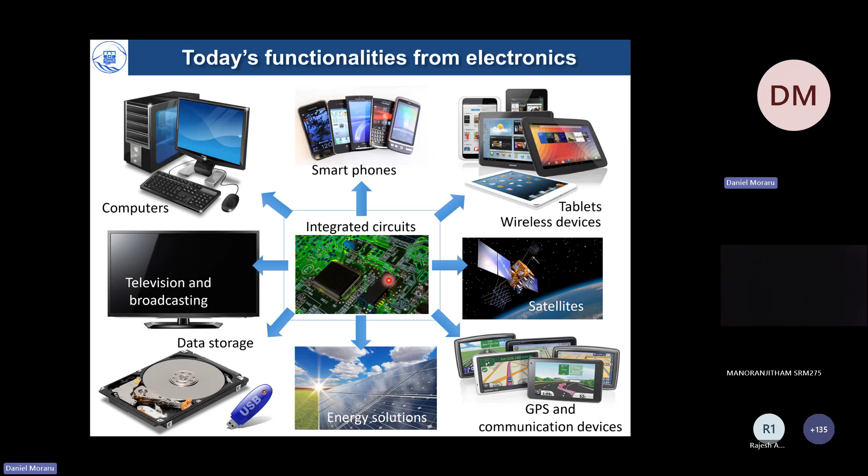So let me start with the first very brief historical introduction. Of course, we are very much aware of the importance of integrated circuits in our daily life. This is one version of many slides that reveal how electronics affects all aspects of our lives, from communication to storing of data, wireless and smartphones, satellite GPS. Anything is now affected by the capabilities of the integrated circuits, which are at the core of any computer. But behind the integrated circuits is the invention of the transistor.

And here is a probably very famous snapshot from about 80 years ago of John Bardeen, Walter Brattain and William Shockley, who co-invented the transistor. And that was, in a way, a breakthrough, moving away from the vacuum tubes that were used as switches. The transistor was not very beautiful. It was just a piece of semiconductor in contact with a piece of metal, but it worked as an on-off switch. And it was enough to trigger further development.

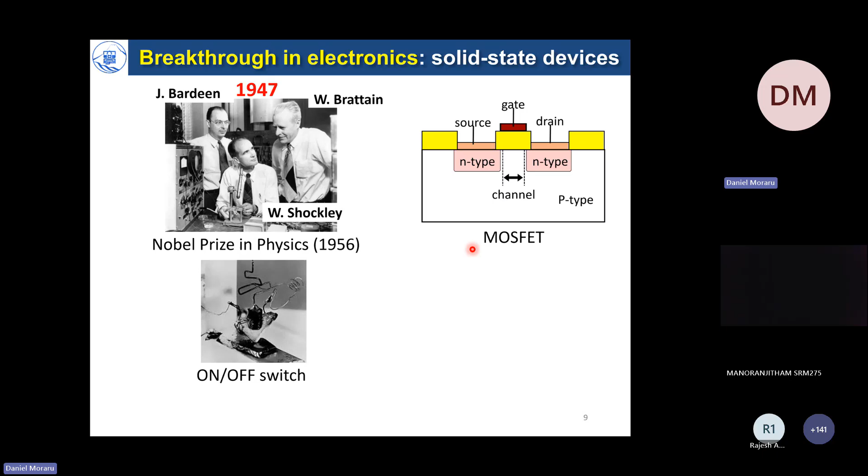Now you are very much familiar with this kind of view. You may have a source and a drain, let's say N-type, and a channel which is P-type, with its potential controlled by the gate. That's a MOSFET, metal oxide semiconductor field effect transistor. Now, this in billions and billions is connected inside a 1 centimeter by 1 centimeter chip, and it provides us the functionality that we benefit from nowadays.

So, historically speaking, we should treat the transistor demonstration as a trigger to the information age, and what followed next was very famous: the continuous miniaturization along Moore's law, Gordon Moore being the Intel CEO at that time in the 1960s. So this view is very famous.

The horizontal axis shows the year, the vertical axis shows either transistor density, or on the right, the minimum feature size, the gate length typically. So as you may see, in the 1970s to 1990s, practically Intel was the leader and the pioneer in the field of electronics, and these integrated circuits contained not this kind of transistors, of course, refined transistors, but just a few hundreds or thousands of transistors with dimensions on the order of a micrometer.

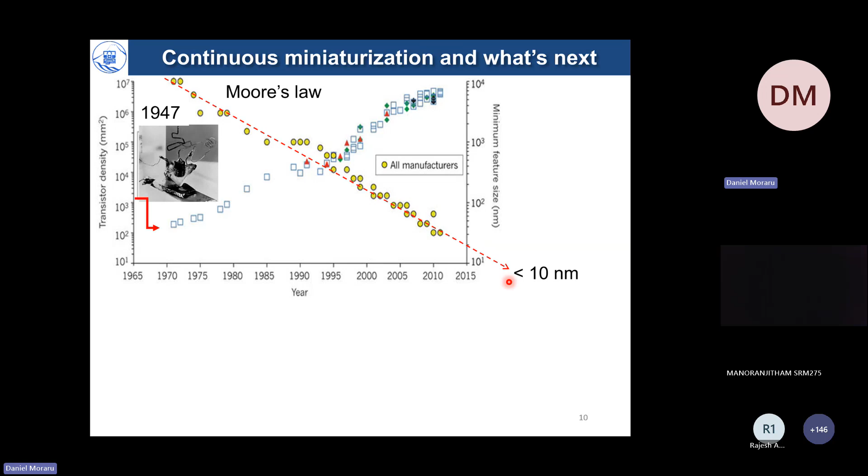But then things were developed so much by competition and by manufacturing improvements that nowadays, this figure is a little bit outdated, but nowadays we certainly have gate lengths below 10 nanometers in our computers, actually. And that allows us to pack a lot of information into a very small area. A few years ago, the 22 nanometer node brought us also to some vertical scaling, and this also helps to push this law further and further.

However, we are all aware that we are reaching the physical limits, and in my lab, as to what we see about the next generations of electronics, since this is the purpose of this training as well: in my view, we'd like to use electrons one by one. So ideally, we want low power consumption from these devices. A compact design should also be expected.

So every atom counts, and we want to involve fundamental physics, especially quantum mechanics, which is not sufficiently included in the current operation of transistors. We also want to keep CMOS compatibility for many reasons, including costs, but also including advanced technologies. So with this in mind, my lab's view is to attack the problem of controlling single electron tunneling in silicon nano devices as one of the new mechanisms for the next generations of electronics. How we will do that, I will explain in the next slides.

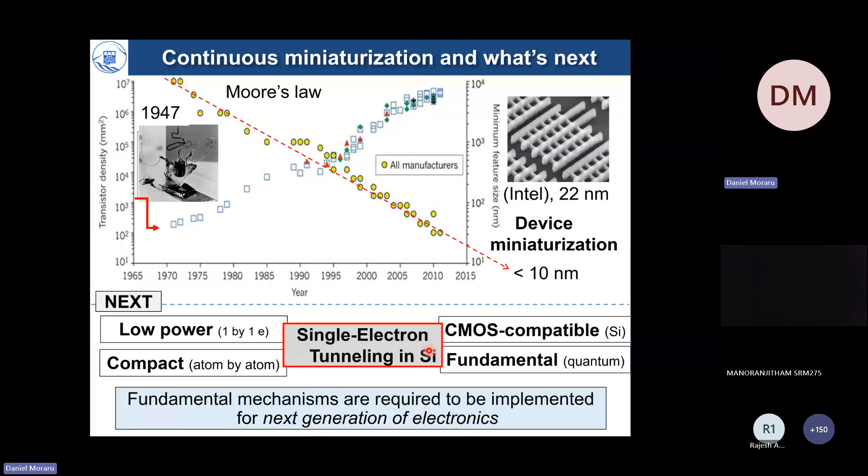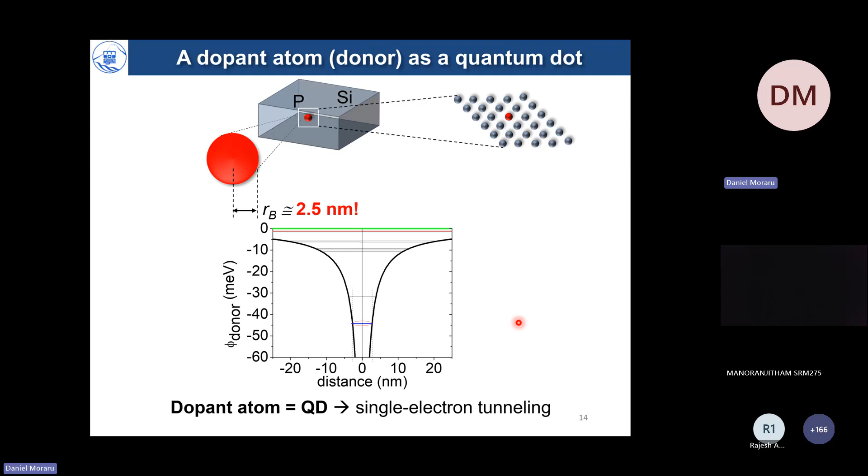Of course, we know the spectrum of this kind of atoms very well for tens of years by now, but what we don't perceive very clearly is that this can become a quantum dot. Once an electron is injected here, if we could avoid its thermal activation to the conduction band, we can actually move it in and out by tunneling from leads nearby, and that makes it a very good quantum dot.

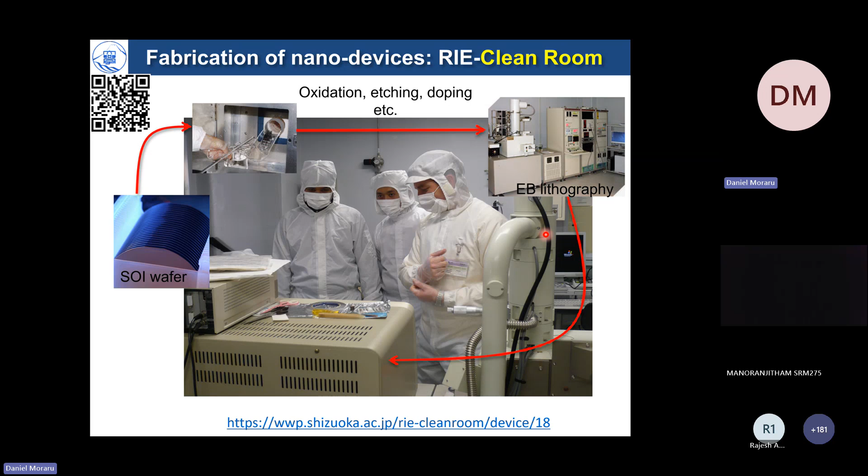So please check what is available in our clean room from these links if you're interested, and hopefully in the future you can experience these techniques as well.

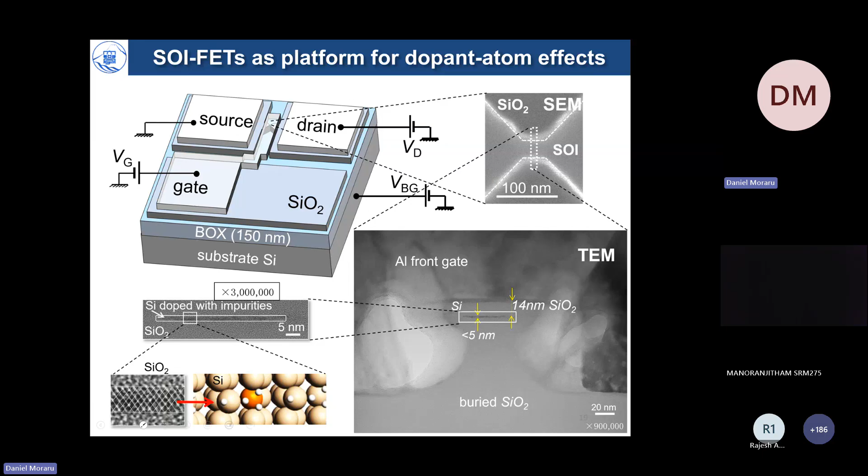Now, even this kind of small dimensionality capabilities are not so interesting for us. What we are interested in is the functionality that we can obtain from substitutional dopant atoms or impurity atoms and not from silicon atoms. So we should understand very clearly that we are actually building these big devices, actually microscale devices with nanoscale or hundreds of nanometer size channels in order to capture the atomic level functionalities.

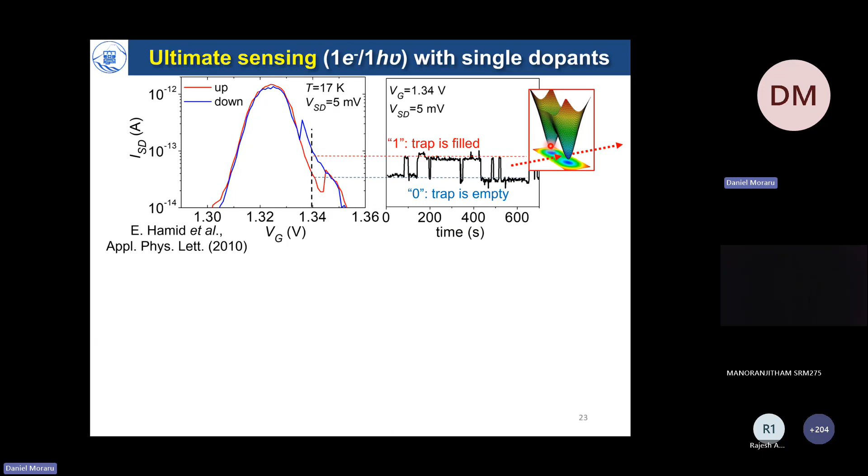And that switching is actually a detection using single electron tunneling through one dopant of a charge state of another dopant working as a trap. So this could be developed or converted into a memory concept which utilizes a single atom as a sensor and a single atom as a memory node.

We could also use these devices under light irradiation because every single photon absorbed in this channel converts into an electron-hole pair. Now, if you have traps nearby, the electrons can be captured by these traps, and we can actually use this single electron tunneling current to sense this kind of traps. So if you compare the time dependence in dark with the one under light illumination, here we use the visible light, we can see that there is a clear dependence on the photon flux in terms of switching of a current, so-called random telegraph signals.

So this kind of dependence indicates that the number of photons influences the number of electrons trapped, which subsequently influence capacitively the charge flow to the main dopant. Again, this is another APL around that time. So this was our initial statement. But please note that temperatures were relatively low.

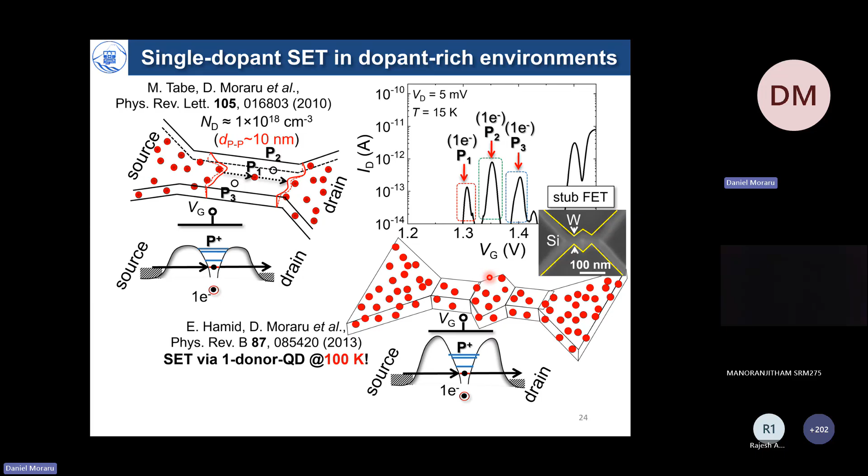So now with this kind of background and this kind of physics, we wanted to raise the operation temperature. So to do that, we figured out that we should change the simplistic structure of a channel into a stub-shaped channel. The reason for that was that even if you have a random doping in this kind of devices, some of the dopants could be in these sharp corners and surrounded mostly by SiO2 oxide, and also affected by quantum confinement and dielectric confinement. In that case, the dopant state becomes deeper.

So with that, we demonstrated that a single electron tunneling current peak can be observed in some devices even at a temperature of 100 Kelvin, and that was reported as a world record for single dopant devices in 2013 already. What you should notice here, however, is that this is not an easy current to catch. Please note the current level of this kind of peak embedded into an otherwise FET on-off switch current. The current level is just a few tens of femtoamps.

So in order to detect this kind of currents, we should have the equipment and also the stability of a measurement system and the high quality of the devices. Otherwise, this is embedded completely in the noise level.

So we reported our vision about single dopants and what we can do with them in this Nanoscale Research Letters, Nano Review. And of course, we can develop transistors, we can develop memory devices with two dopants. If you have more dopants, you can build turnstiles or pumps. And as I showed earlier, optoelectronics based on dopants is also an option.

And I'd like to add to that the fact that we can actually see these dopants with Kelvin probe force microscope, KFM. So if you're interested, please read what we summarized at that time, again, many years ago, as atom devices based on single dopants in silicon nanostructures. So there is already a lot of development, not only from our group, but from other groups around the world in this field.

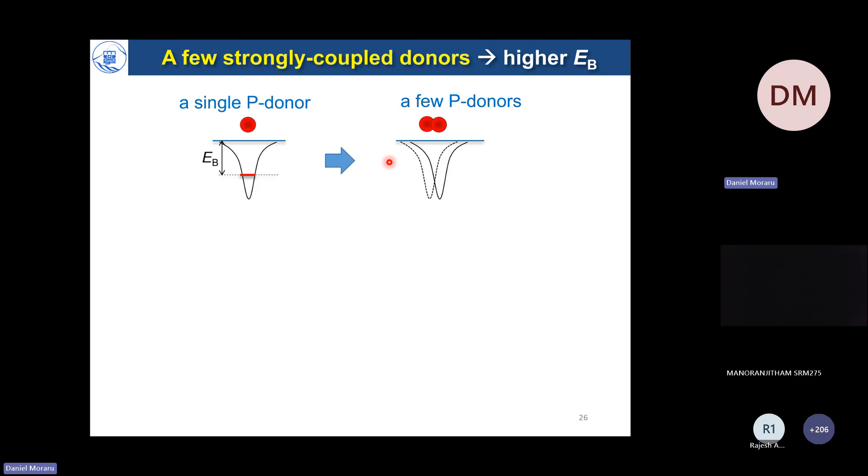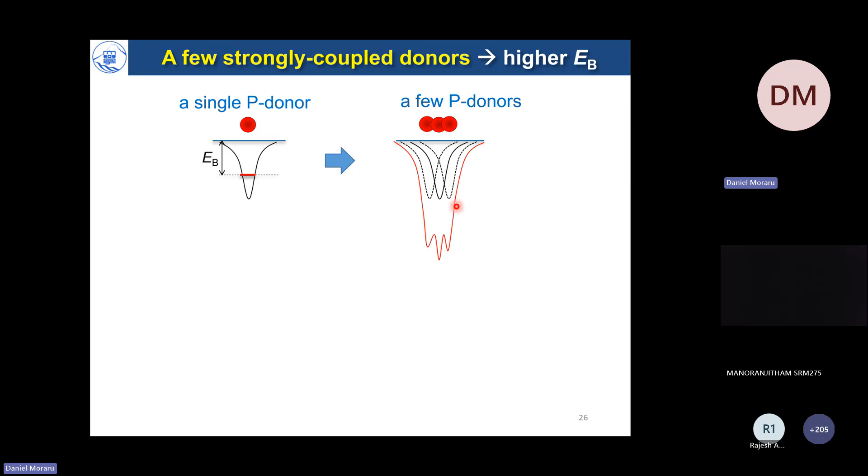So if you couple two donors together, we get a deeper potential well. If you couple three donors together, you get an even deeper potential well. In that way, this kind of a system works as a molecule but at the same time, it can allow us to move from a system with a small tunnel barrier to a system with an enhanced tunnel barrier, as shown on the right.

And then we spin coat the doping source on top of this slightly oxidized surface and drive in the dopants through a thermal diffusion technique in a furnace or a rapid thermal annealing machine. And then the dopants will be introduced only in the desired positions because they cannot penetrate through this oxide mask. Nevertheless, we should be aware that there is side diffusion, so it's not a perfect process.

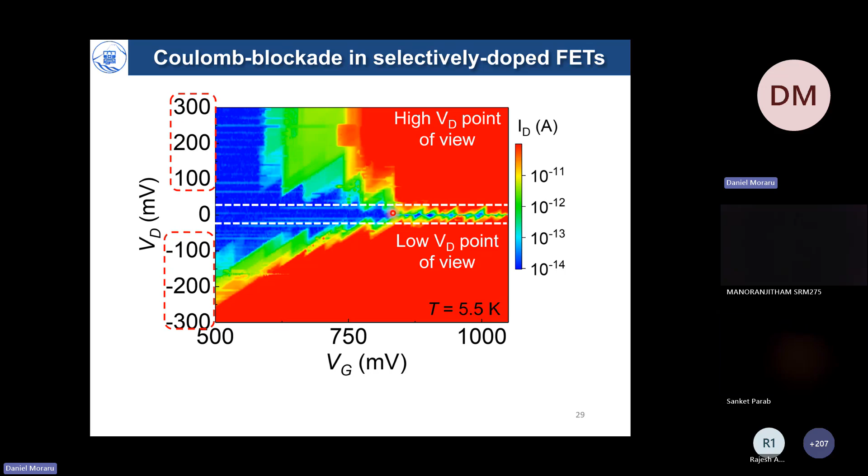They do not close at VD equals 0, and that makes them a little bit peculiar considering our expectation that a single quantum dot works in these devices. So we can at least simply split the stability diagram into two. One is the large diamonds observed at low VG, and the other zone is where we observe fine diamonds at high VG. Each of them will be explained next.

So let me show you one device. For instance, this is a selectively doped SOI-FET device A. We observe this pattern; it is the same device that we explained earlier. And this is a zoom in on this zone of interest, zone 1. What we observe here as dashed lines are these diamonds, open diamonds that I will explain a bit later.

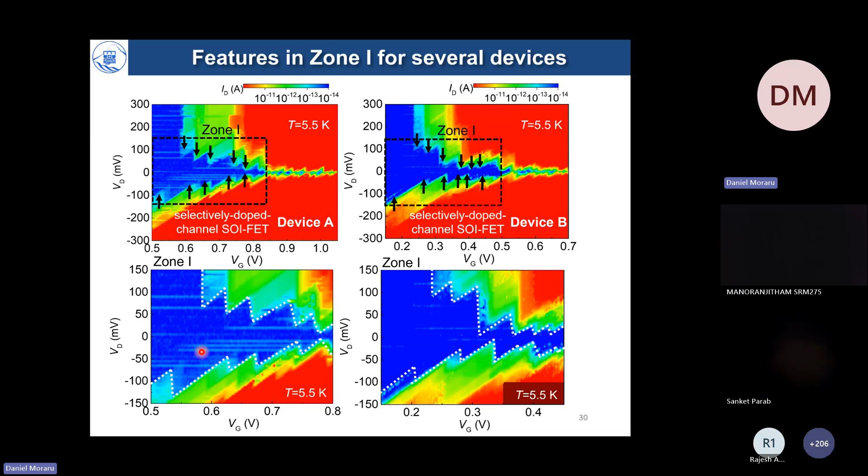Another device exhibits similar but different behavior in terms of voltages and in terms of pattern. But nevertheless, we have two zones, zone 1, which contains these broad open Coulomb diamonds. So the reason for this was a little bit mysterious at that time, and we couldn't explain why we observe the structures from a single quantum dot. So I will explain later how we interpret this.

This quantum dot is actually in the middle between source and drain in a selectively doped region, and it gives rise to such characteristics at very low temperatures. We should note, however, that the gate voltage controls not only the potential of a quantum dot, but also the potential of the barriers themselves. So in that sense, we can actually expect that the resistances affect very much the transport.

So by that time, the gate voltage allows you to fill in this multiple donor cluster quantum dot almost completely, and we are left with only very shallow potential fluctuations, and electrons would tunnel in this way from source to drain at the higher voltages. So now let me return to how we interpret these devices.

Well, if you apply the gate voltage, we are moving the potential in the channel both in the quantum dot and in its barriers. So therefore, we should be aware that the tunnel resistance is actually dependent on the gate voltage. At the same time, what happens when you apply source drain bias? If you apply the drain voltage positively and ground the source, only the drain side barrier will move. So in that sense, we should be sensitive to the drain side tunnel resistance and its dependence on VD.

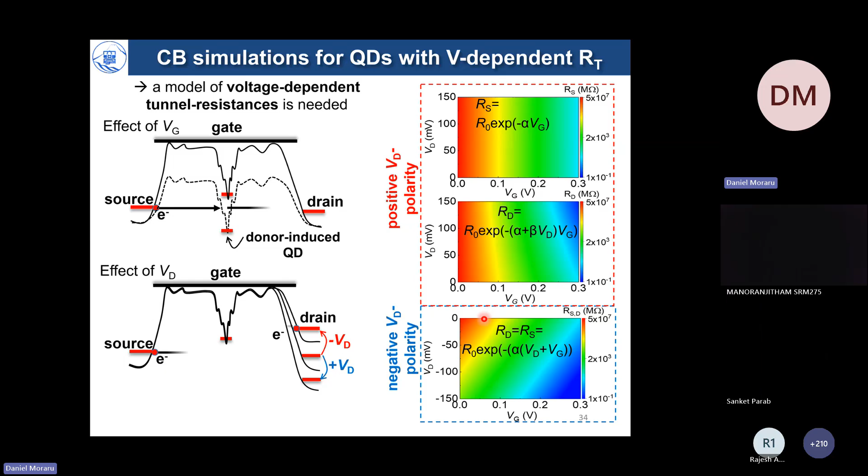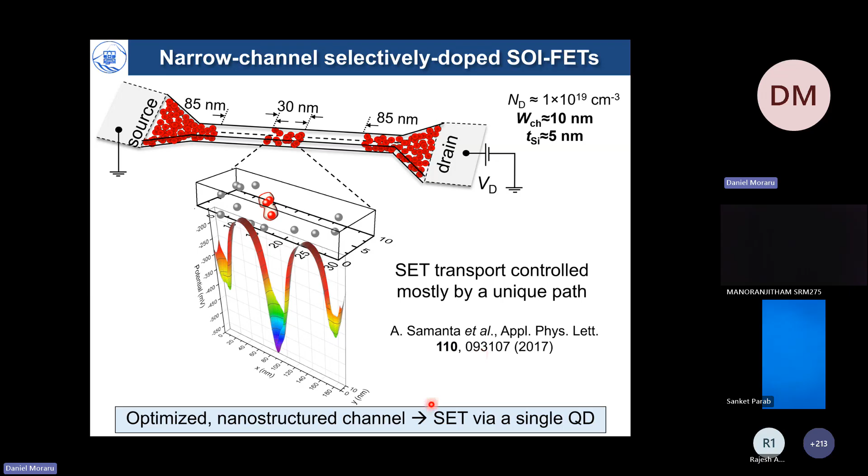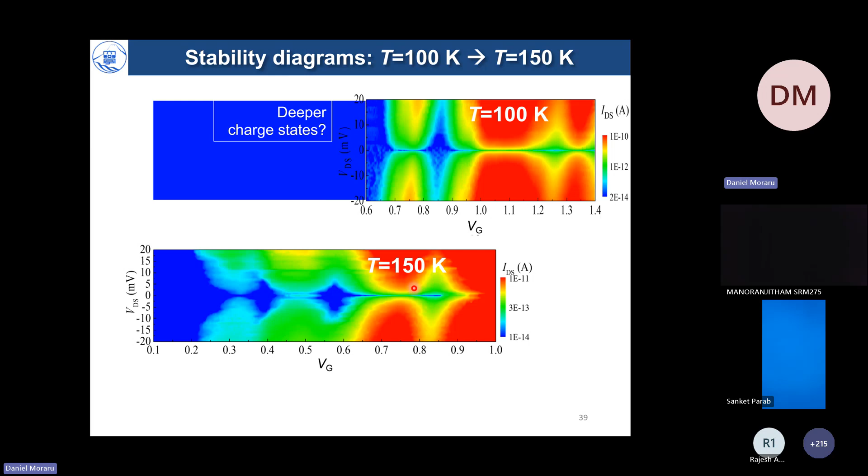And this means that we are actually able to see at mid-temperature range that one electron can be stably trapped in this zone without contributing to current. So it's already a big achievement, but we were curious if we really are dealing with a molecule formed by a few donors. In that case, we should have deeper charge states. If we raise the temperature further to 150 Kelvin, we indeed observed two more Coulomb diamonds at deeper charge states. And that means two more electrons can be finally observed by raising the temperature. And the third electron is also barely seen.

So midway to room temperature, at 150 Kelvin, we can actually read the operation of this device in the following way. As we increase the gate voltage from, let's say, 0.2, 0.3, up to 0.4, exactly one electron can be added into the channel. And if you switch the voltage a little further, you can get even further addition.

Is it okay? Everything is fine? Please mute the mic, participants. Madam, you are set to blocked. Unmute yourself, madam. Okay, better. Sorry, sir. No problem. You go to settings to unmute everyone. It's okay. So sorry for the delay. Should I continue? Yes, sir, please.

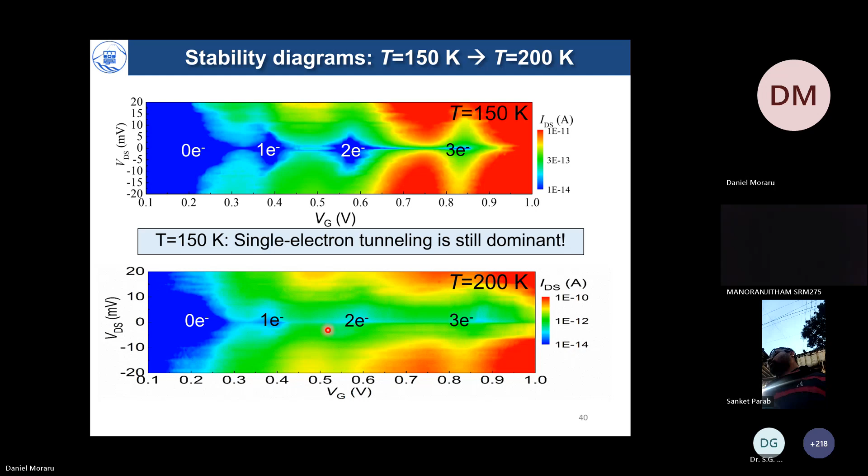Sir, you are muted, sir. Okay, now it's fine? Yes. Yes, sir. Okay, yes, sir.

So you're muted again. Yes, I don't know why this happens, but okay. Okay, can you hear me now? Yes, sir. Okay. So hopefully it stays unmuted.

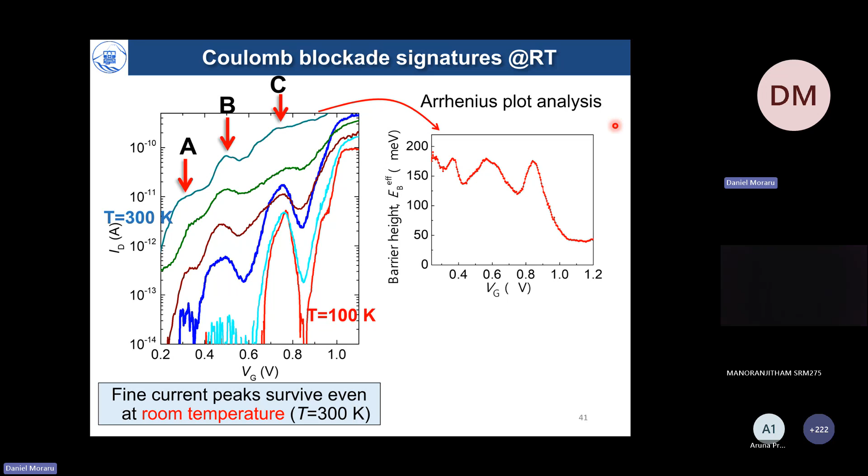So we are actually observing only a few weak inflections in the structures of FET behavior. So let me just move to the next slide. Okay, so why does this happen actually? The reason for this is that the barrier heights are very high now. So from an Arrhenius plot analysis, we can observe that there are oscillating currents.

So let me confirm that you can hear me now, right? I can be heard properly.

Okay, so from an Arrhenius plot analysis, we can extract the barrier height. The effective barrier height is actually relatively large, 150 millielectron volts, and that is significantly larger than the kBT at room temperature, than the barrier height of a single dopant. These oscillations are due to so-called Coulomb blockade of activated conduction. I will skip that explanation for time's sake.

But please understand that even these oscillations from the effective barrier height have a meaning related to the single electron tunneling currents. So I will leave you with this message that in this Applied Physics Letters from 2017, together with Professor Samanta, we provide a very important overview that we can bring this operation midway towards room temperature. Now, I will skip this because this is already included in the paper that I mentioned.

How can we further increase the operation temperature of these devices? So this is another work from one of my PhD students, a different one, starting from the concept of the junctionless transistor. Maybe you are very familiar with this. This is a transistor which does not need NP or PN junctions. It's uniformly doped at relatively high concentrations, 10^19, 10^20 per cubic centimeter, but at the same time, it is very, very small.

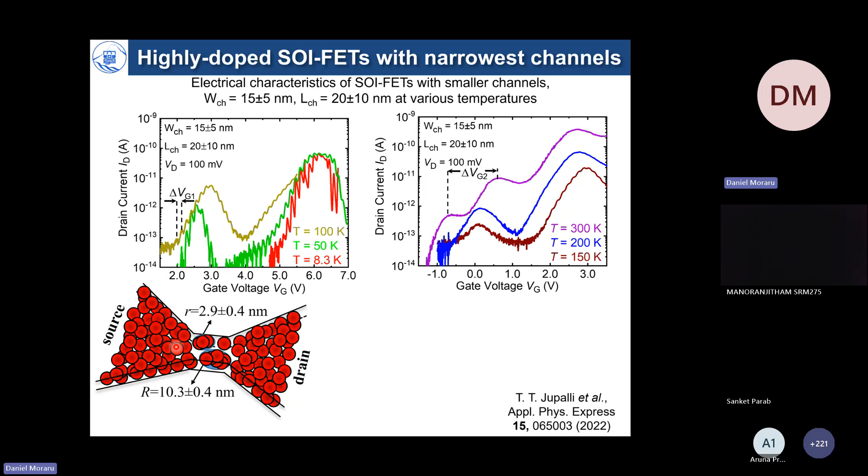As reported in this Applied Physics Express paper by my PhD student, the analysis shows that we are dealing with two quantum dots in the channel. One is a little bit smaller, one is a little bit larger. The sizes can be calculated from the periodicity between these peaks. We were able to observe SET through these two different quantum dots, while cutting off the metallic paths between source and drain because we squeezed down the dimensionality of the channel. So this is room temperature operation of SETs, and this is what I wanted to leave you with about this part of my talk.

So if time still allows me a few more minutes, I'd like to talk about silicon nanodiodes. So please tell me if I'm going over time too much. I will stop at any time. So yes, sir, you can proceed, sir.

Thank you very much. So silicon nanodiodes are also another very important electronic device, not only transistors. And they exhibit in our research atomic level functionalities and, maybe also importantly, single charge band-to-band tunneling. So I'll show you what kind of device we use. They are the so-called Esaki diodes, which were proposed by Leo Esaki a long time ago, and which have a very unique operation. They are not rectifying devices, or they are rectifying in a different way. The reverse current is actually very high because we are seeing band-to-band tunneling, similar to Zener tunneling.

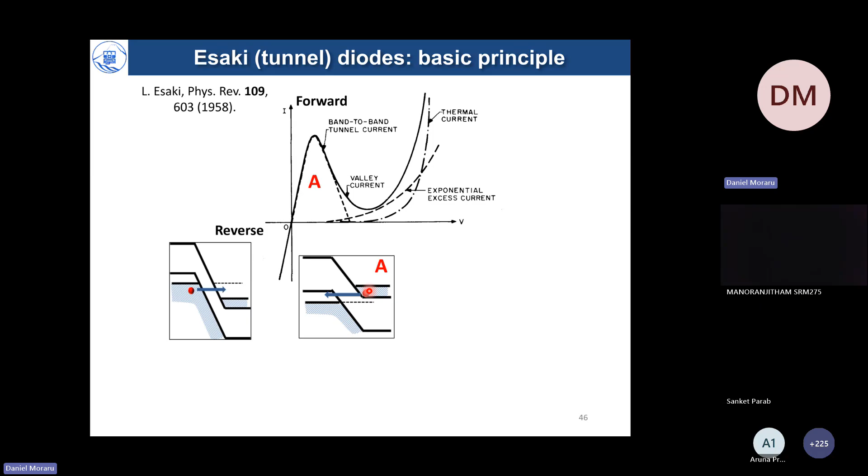In the forward bias, we can observe an NDC peak, negative differential conductance peak, due to the fact that we have degenerately doped P and N regions on both sides. Electrons are plenty in the N region, and states for electrons to tunnel into are plenty in the p-type region. At the same time, the depletion layer is very narrow. So quantum tunneling allows currents to flow from right to left in this view. The middle part is excess current, and the upper part is the regular thermally activated current of a PN diode.

Not very important in this story, but the focus is around here, which allows us to see band-to-band tunneling at this low forward bias. Also reverse is very interesting. So we tried to propose this kind of new mechanism as a new option. But for that, we also needed to fabricate the devices in our lab. So I'm returning back to this schematic because this is a silicon-on-insulator wafer, and we doped this laterally, which is quite unique and different from the typical way to make PN diodes in material science.

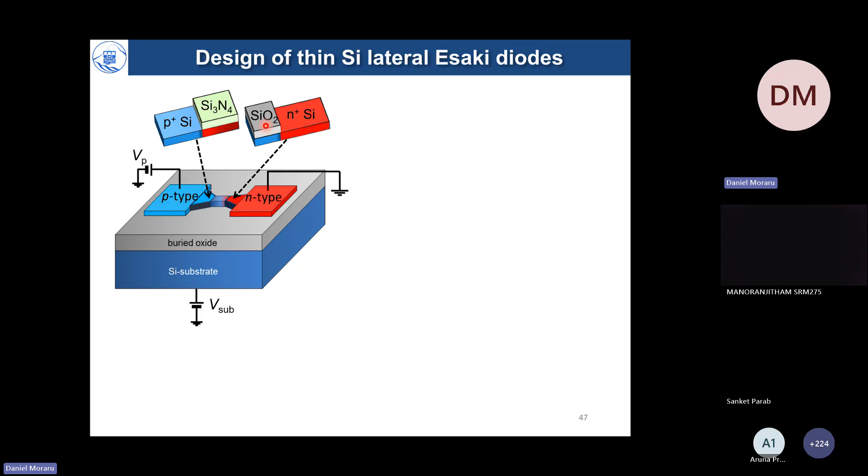Our struggle was to raise the doping concentrations to the order of 10 to the power 20 or higher for both P and N, which is doable in phosphorus. It's not so easy to do in other materials, but doable in silicon. So this way, we obtain the degenerately doped N and P regions, and we can expect that the depletion layer width is narrow enough to allow band-to-band tunneling.

So with this said, I think now we can expect that there are some effects due to thin SOI layers. Dielectric confinement will play a role, and I will explain a little bit about our Applied Physics Letters paper from 2016. And at the same time, because we have many dopants in these depletion layers, clusters can be expected, and that was the core concept of this other APL paper.

So first of all, what would happen if you have phosphorus and boron coupled together in a depletion layer? Basically, they are known as shallow dopants because the energy levels are only 45 millielectron volts near the respective bands. However, if you make it very thin, two-dimensional, even one-dimensional, the levels are deepened, and then the phosphorus and boron can actually become pretty close to the mid-gap. In that way, phosphorus and boron, either single dopants or clusters of dopants, can introduce gap states. And these gap states become, surprisingly, stepping stones on the way of an electron from, let's say, the N plus lead towards the P plus available states. So this mediation of the dopant states is actually very important for fundamental applications of dopants.

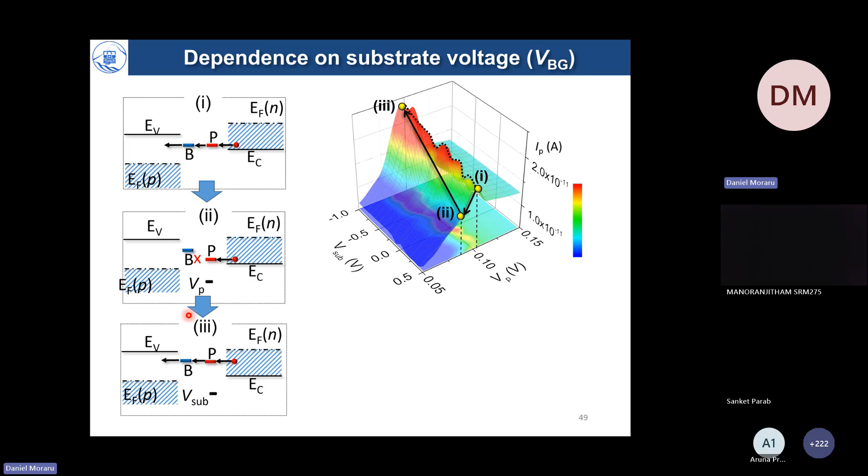If you apply different VP, then we move them off resonance, but we can recover the resonance by applying substrate voltage, which is differently coupled to each of the dopant states. So with this, we have a proof of principle of the fact that gate control is observed, and this was submitted to and published in Applied Physics Letters together with Professor Michiharu Tabe.

Now, that was not enough for us, and we wanted to understand the physics more, and we appealed to ab initio simulations where we mimicked our nanowires as p-type, n-type wires with exactly one phosphorus and boron on each side and compared them to the non-doped case. And under the right conditions, we can observe indeed this kind of sharply enhanced current peak, which only belongs to the case of when a phosphorus and the boron dopant mediate transport from one side to the other. Now, what this means is actually that we are looking here at an atomic level p-n tunnel diode.

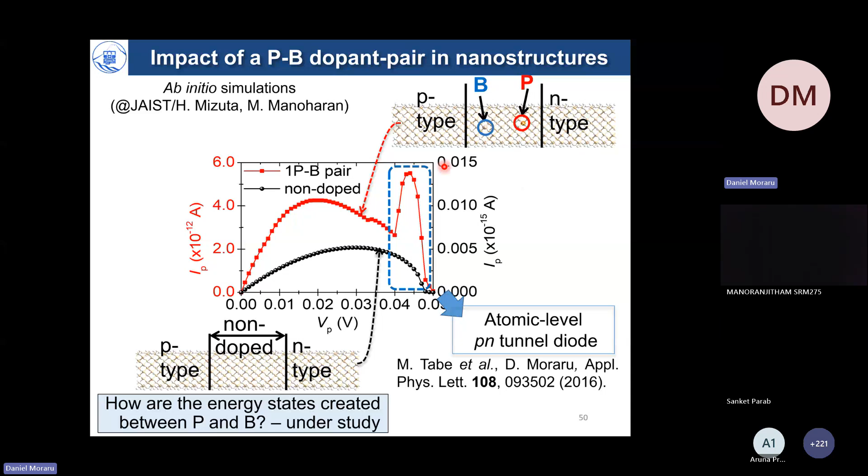And that brings me to the fundamental functionalities that I was mentioning earlier. We still investigate how the energy states are created, if a single dopant is responsible or a cluster of dopants. This is another issue to study. Hopefully, we can cross paths in this kind of study in the future.

Now, one more concept was actually developed together with another PhD student from my lab, who incidentally comes from SRM University. He did his master course there and then joined my group, Mr. Gaurang Prabhudesai. So he changed the perspective of how we see depletion layers actually for nanoscale. We doped very highly phosphorus and boron, and we expected indeed the depletion layer width to be very narrow. But our view of a p-n diode of a depletion layer is actually incomplete until we think about it atomistically.

So we always have a jelly-like model image of doping concentrations and the macroscopic view of band diagrams, but the truth is shown in this view. Dopants are randomly distributed, boron on the left, phosphorus on the right, and both of them mixed at the junction point. So if the dimensions of the device are very small, then this mixture creates random structures. And if you take a scan through any of these points, you may observe a regular p-n diode band diagram in some points, like a conventional tunnel diode, but in other points, you could observe actually quantum dots embedded into this band diagram and modulating very significantly the band diagram. So this kind of view arises from the random distribution of dopants in this kind of low-dimensional diodes.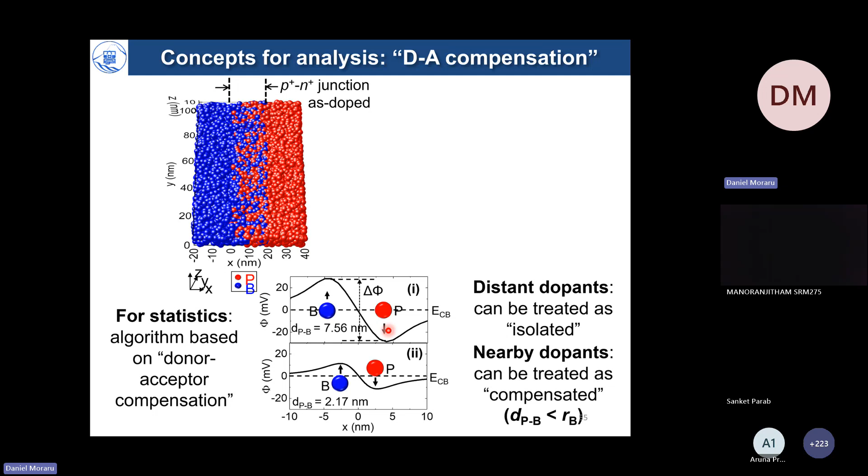Since we have many phosphorus and many borons, and they have opposite potential wells, they actually cancel each other if they are near to each other, at least nearer than the Bohr radius. So if they are distant from each other, neighboring dopants, so one donor and one acceptor, they can be still treated as isolated, and they influence the potential significantly by themselves. But if you remove the dopants which are compensating each other, the picture is much simplified.

And now we can see these clusters arranged in a few places. Because we have larger donor concentration, we also have donor clusters more visibly present in this depletion layer. So we counted statistically 100 cases. This is a little bit complicated statistics. The number of phosphorus donors is actually 2,000 in this nanoscale depletion layer. But then we can compensate, and after compensation, we are left with just about 100, 150 donors which matter.

So these donors are now redistributed randomly, and we are monitoring the type of molecules that they form. So you can see here how many donors are embedded into each of these molecules. Based on the fraction of cases, this histogram shows that 5 to 10 donors could be a reasonably good quantum dot that can operate in the following way. It's a stepping stone for the electrons starting from the N lead, moving towards the P lead for band-to-band tunneling, while this is filtered to the level of single electron tunneling.

So we can also understand the positions of the dopants and the extension of this quantum dot statistically. There is a lot of understanding from this paper, Applied Physics Letters from 2019. So I strongly encourage you to look into this if you want to change your perspective about how dopants and the randomness of doping influence the devices.

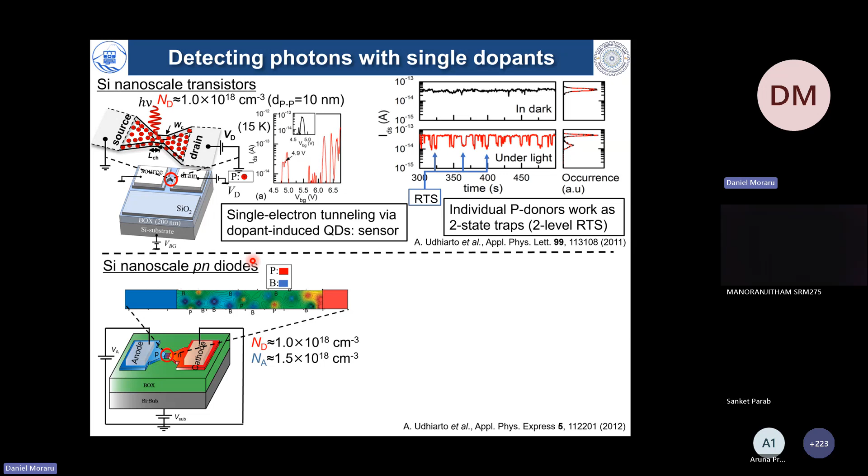Now, at similar low concentrations, but in p-n diodes, with both concentrations in the order of 10 to the power 18 per cubic centimeter, we should think very clearly about the atomistic distribution of the dopants again. Boron and phosphorus dopants can modulate the potential very dramatically. Now, if you irradiate light on these devices, we can see a different type of random telegraph signals.

They are multi-level signals. In fact, if you look at some of the digitized RTS, it's a three-level signal with a low, medium, and high level quite clearly visible. This Applied Physics Express paper explains how this is related to trapping in a phosphorus and trapping in a boron atom almost simultaneously. So this is why we are seeing multiple-level RTS.

More recently, we looked at co-doped transistors, which are very highly doped. And this work is done again with IIT Roorkee colleagues. It's very important for us to understand that co-doping can build a new type of materials. If you are co-doping at low concentrations, ND and NA, we can create atomic functionalities. If you dope in the middle range, you can create molecules.

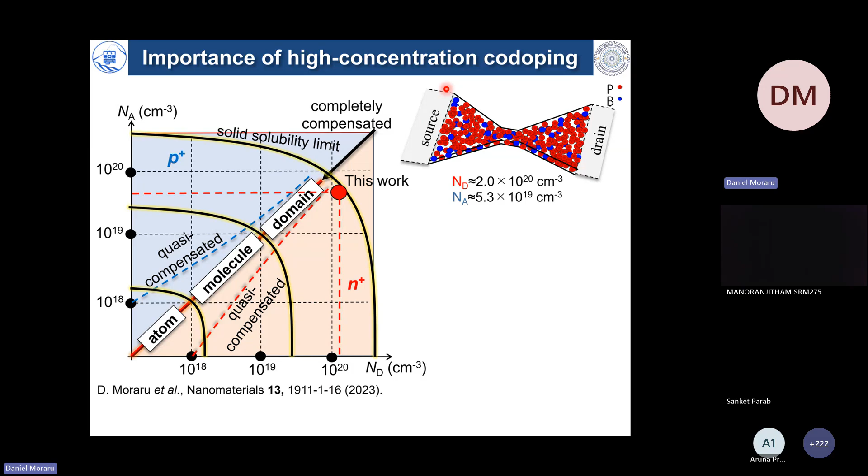If you dope at high concentrations, close to the solid solubility limit, you can even create domains, or areas which are either N-type or P-type. And if you dope in an equal concentration, you can compensate almost perfectly, but please be aware that it's never fully compensated on the nanoscale. So we built these kinds of transistors with doping concentrations illustrated here, and we hoped that by irradiating light here, electrons and holes can be captured both in donor states and in acceptor states simultaneously. This could enhance the sensitivity for carrier trapping in our devices.

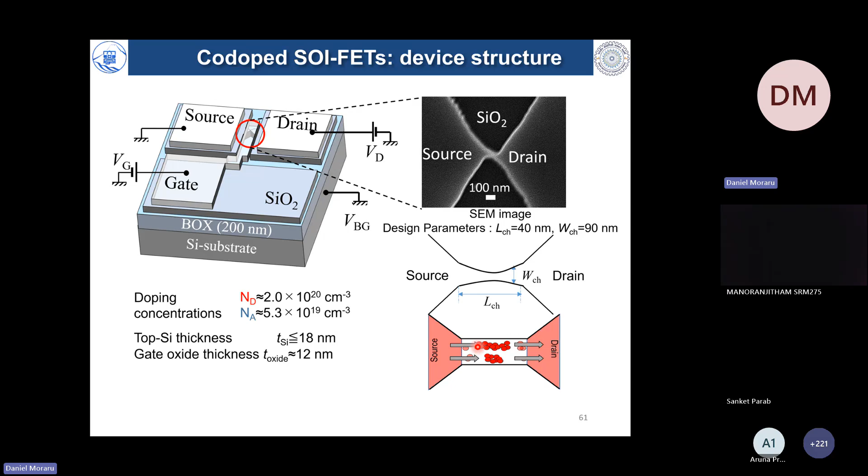So together with researchers from IIT Roorkee visiting my lab for several months, we studied co-doped SOI-FETs like this, with these parameters shown here, but with the top gate removed. What we have between source and drain is an extremely tiny channel, just a few tens of nanometers in width and length, and it looks like that. And we expect that this contains several quantum dots that allow it to operate in the single electron tunneling mode, at low temperatures at least. So we do expect that these multiple SET paths allow us to observe sensitive detection of photo-generated charges.

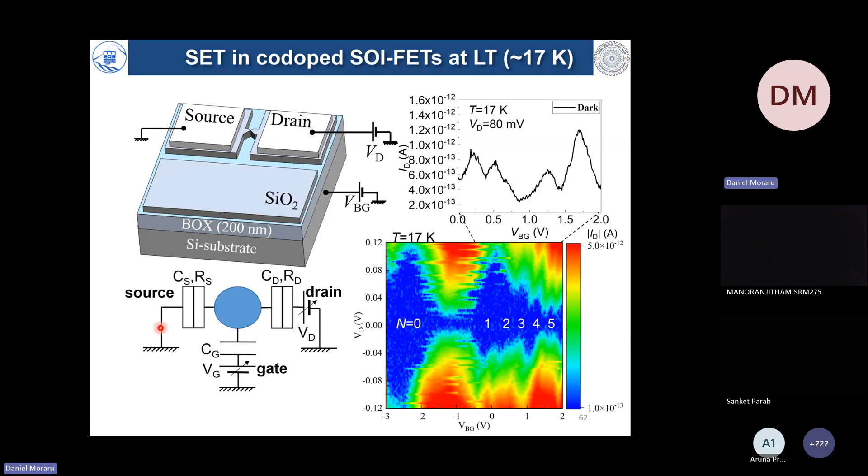So now we removed the gate. We looked at a device without gate and measured the stability diagrams at low temperature. As by now you are familiar, I guess, you can see the Coulomb diamonds a little bit opened and a little bit noisy indeed, where we can count how many electrons we injected into the system from a backgate voltage this time. So if you take the ID-VBG characteristics, you can see the current peaks. And these are, again, telltale signatures of the fact that this is a circuit that could work for our devices as well.

First of all, if you look at visible light, 750 nanometers, please note that this is much larger than the band gap of silicon. So in this case, we can easily generate electron-hole pairs from valence band to conduction band once the photon is absorbed. So that is very important.

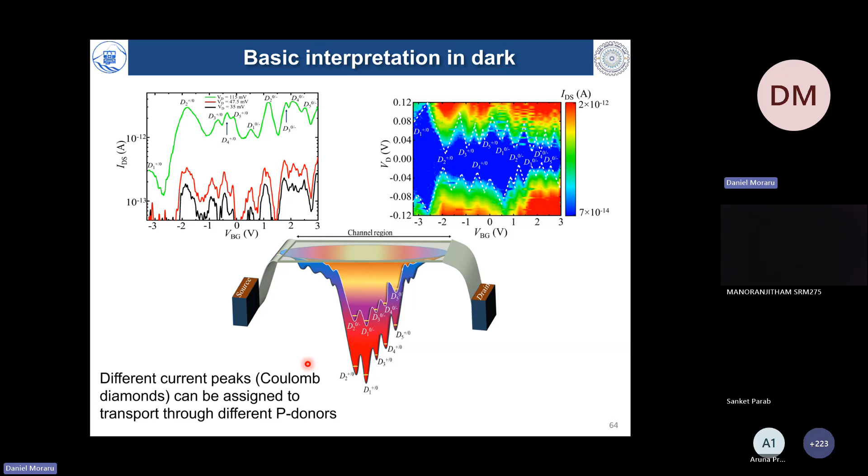And actually, you can see them here counted from D1 to D5, and we've repeated charge states later. So it's very important for us to understand that transport occurs through different phosphorus donors, and each of them can actually be a path of current. Now, it's also very important to understand that a second electron can be added into each quantum dot because we are having deeper states. So now, in dark, we observed this kind of IV characteristics.

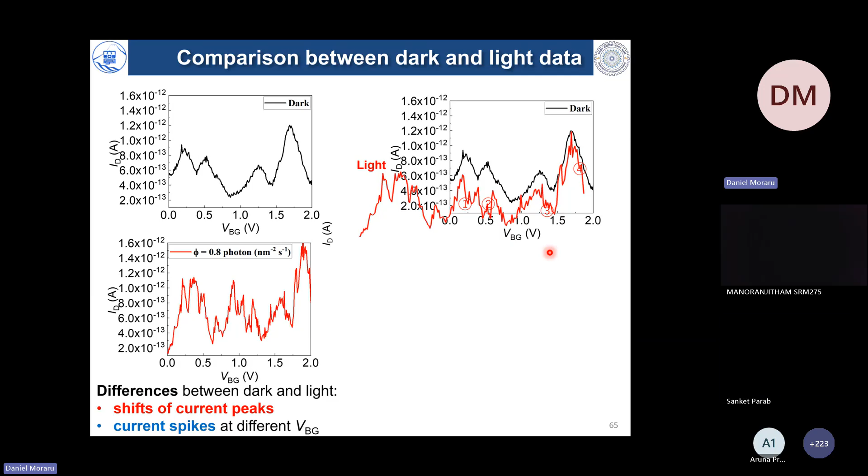Under light, however, with very low incidence of photons, we start to observe noise and also a shift of these IV characteristics. For better understanding, let me stretch these characteristics. And now you can see a better match between the dark and the light characteristics. So what changes this VBG effective scale is the fact that most of the photons coming from the left side pass through the oxide, the silicon layer, and the BOX layer, and they get absorbed mostly in the substrate. So this modifies the backgate voltage effectively. This is an important effect.

More importantly, however, is what happens when we change the photon flux. The number of changes of current, the so-called RTS, is also changing significantly. So if in dark we see practically no change, under light we see RTS, and it depends on the photon flux. And that's a signature that we are sensing our photons absorbed here.

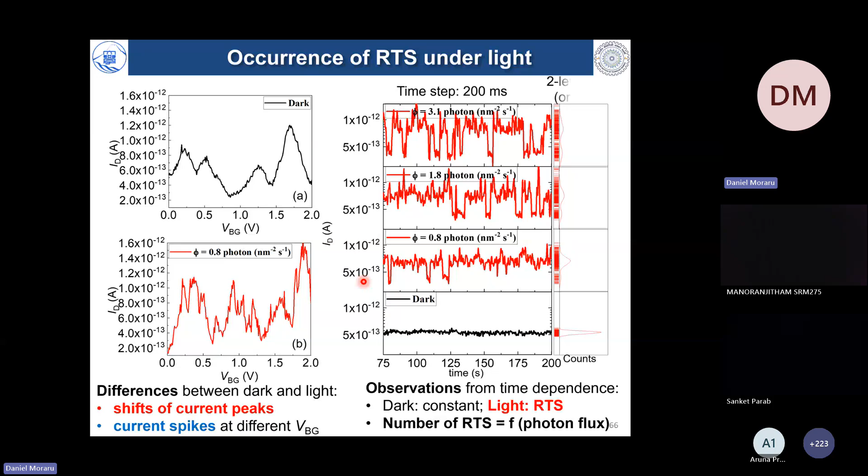To analyze this kind of RTS is very complex, and it's a field of study in itself. In this paper, they reported a variety of types of noise signals and how we can convert them through this WTLP, weighted time lag plot, into more meaningful signals. I will not get into the details. I recommend this paper, but we applied it for our devices.

The place where we applied it most was to demonstrate infrared detectors. Infrared detectors are different than visible light. The photon energy is below the band gap of silicon. So in that case, silicon was not a very good detector for infrared light because it is mostly transparent. So other materials were demonstrated until now in a variety of architectures and structures.

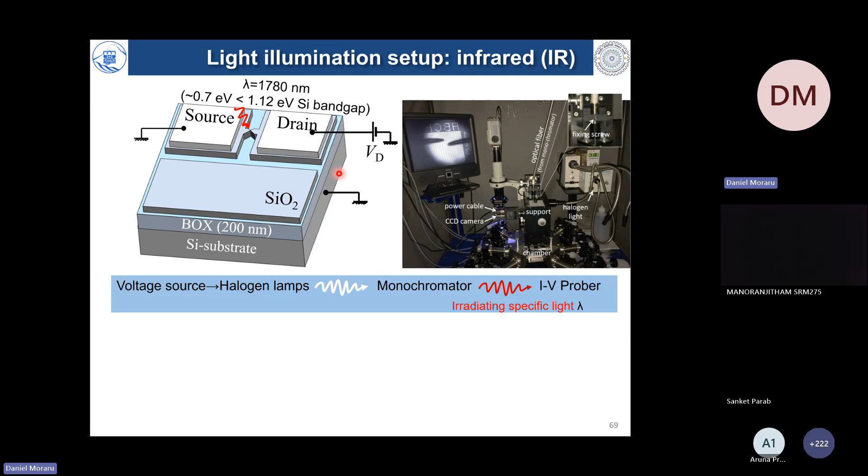However, we are now showing that silicon can actually be used for this using the similar setup, but now irradiating with infrared light. And in that case, we are dealing with photon energies smaller than the band gap, and something happens. And I will show you what's going on. So if you irradiate with 1780 nanometers, you can still see, compared to dark, two-level or a little bit triple-level RTS in our devices.

As the flux is actually increased. Even if we irradiate with 1154 nanometers, we can still see this multiple level RTS, and now we can compare it with other structures. In this case, this is the wavelength effect, and on the right is the photon flux effect. So we finally understood that we can actually detect photons not only in the visible range, but also in near and far infrared regimes, and that demonstrates, as shown in this paper, ultra-sensitive shortwave infrared single photon detection.

Unfortunately, I leave the ultra-sensitive part for you to discover while you are reading this paper published very recently in Advanced Electronic Materials of Wiley. This is a work carried out mostly by Ms. Pooja Sudha, who has now completed her PhD.

The bottom line is this: we have a nanochannel co-doped with phosphorus and boron. The situation is very complex in these channels, but the electrons can travel through a few clusters, and light can generate carriers nearby in some traps, modulating this transport through the quantum dots. So co-doped nanotransistors, because of compensation and randomness of distribution, can create clusters of dopants. At the same time, visible light is very useful. We can detect it very easily, but it is not very elegant in a way.

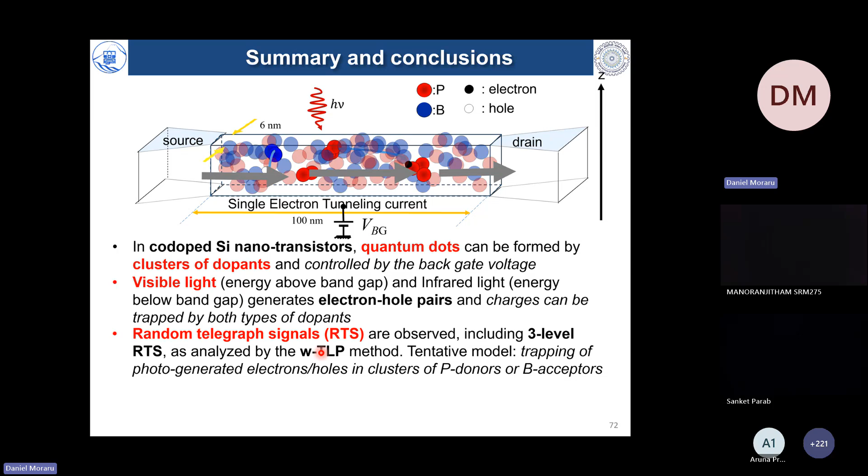On the other hand, we can use the random telegraph signal analysis with WTLP, and finally, we demonstrated that infrared sub-band gap irradiation of photons can be detected. The reason is that the clusters introduce very deep states, and those band tail states mediate the electron and hole capture effects. So co-doped nanoscale silicon transistors can be a good platform for single photon detection, and hopefully we can explore this more in the future.

I took probably a bit more time than I should, but I'm going to leave you with the following summary. Single donor atoms are indeed a versatile system for creating atomic level functionalities, but we have to stick to low temperatures. Raising the temperature is really challenging. Selectively doped multiple donor quantum dots can work for room temperature SETs. We demonstrated that, and they are more robust, but they are not atomic level functions. We have to discard that concept. We can probe and interpret them at low temperatures.

Even in Esaki diodes, highly doped tunnel diodes, band-to-band tunneling current can be enhanced by a phosphorus-boron pair, or modulated by single charge tunneling. These are new mechanisms that can be leveraged for the next generation of electronics. I left you at the end with a flavor of photonics. Single photon detection can be achieved in various structures, which makes it a very good atomic and molecular level electronics platform to consider in the future.

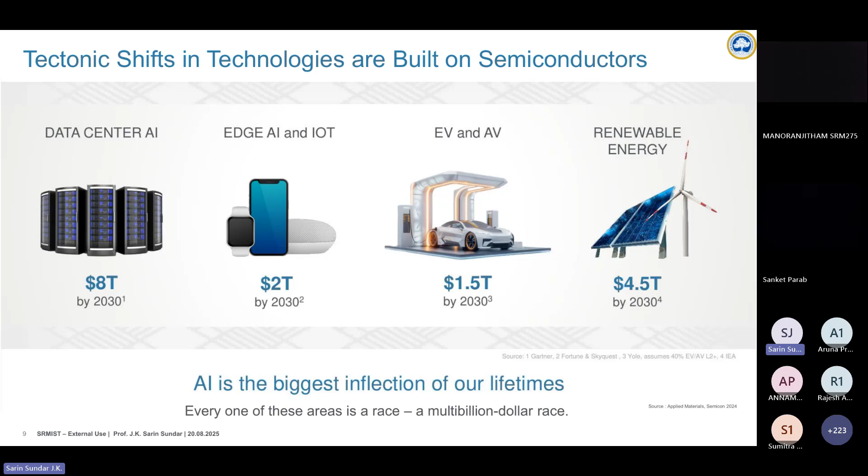If you look today at the overall energy consumption in the world, people don't realize that more than 10% of all the energy we produce is used only for computing: your cell phones, tablets, laptops, data centers, Bitcoin mining, and so on. And this is going to significantly change in the next 5 to 10 years. In the US alone, one estimate, from the recent sustainability report which came out last week from Applied, says 20% of all the energy produced will be used only for computing. And all this again translates to how you design, how you manufacture, and where the defects are.

And you also see the energy consumption driven by training the AI models. GPT-5 came out 2 weeks ago, but between GPT-1 and GPT-4 itself, there is a 10,000x increase in FLOPs, floating point operations, and the energy consumption has increased 250 times. The AI accelerator chips are extremely hot, and they require a huge amount of power to run them to train the model.

I'll just quickly skip through some of these slides because you know them. I'm only showing this because it will lead me into the defects presentation later. This is the old Apple A14, which is typically about 10 by 10 millimeters, 100 mm square. If you take a cross section, you will see the chip cross section, and at the bottom of this is where your transistors lie. The A14 is 5 nanometer technology, with 11.8 billion FinFET transistors in a single chip.

And for those 11.8 billion transistors, you need typically 24 billion contacts and different types of threshold. You know all this, but when we manufacture this at large scale, on a full wafer, there are going to be defects which will determine whether the chip will pass or fail, and that will determine the yield of the factory, and whether the technology is successful or not.

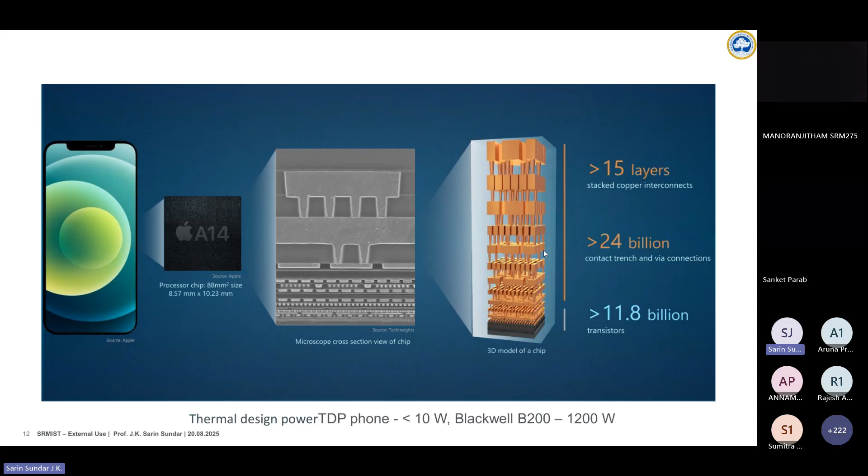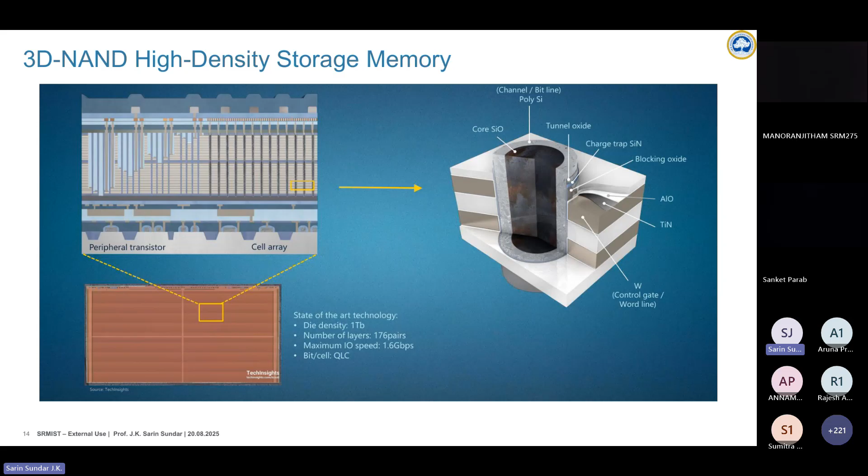So it has extremely high aspect ratio holes to be etched. And again, it's very, very sensitive to defects, because even if one layer of the 1,000 layers or 256 layers has a defect, that will translate into the performance of the whole stack, right? And this is an example which I showed last year also.

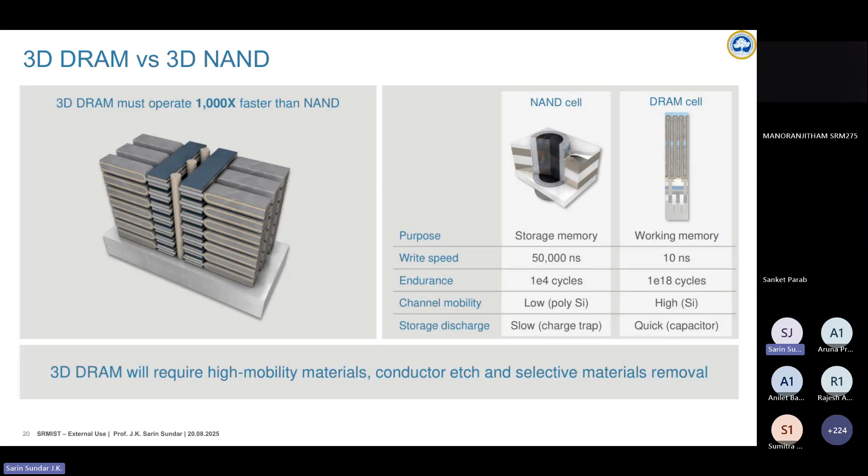And the work is going on this side also. And today, people also find that DRAM is more stable, doesn't fail. At least the memory loss problems are not there when you do AI training compared to HBM. And here is a small HBM process flow. So basically, I'll probably skip this and go into the defects part. You will see it in the presentation.

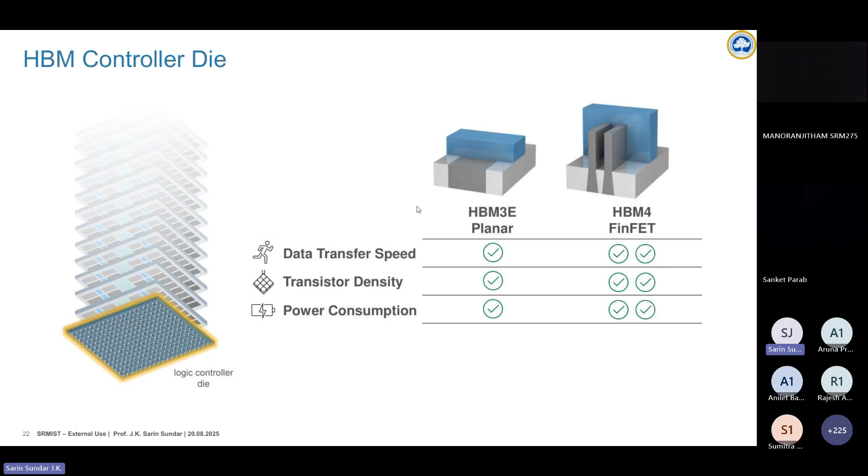And yes, so this is also the HBM4 FinFET, which is now the latest technology. Earlier, 2 years back, it was mostly on the planar side. So 28 nanometers is still planar, if you look at it technology node wise. And now I'll start a little bit of an overview about various processes and defects for the angstrom era. So now this is the sub 2 nanometer era. So today we have 1.4, 1.8.

So I would like to start with a video before that. It's a 6-minute video which will explain the gate-all-around transistor. So I hope I can show the video if it is working here. This is a video from Applied Materials. Please let me know if you cannot see, or I can show other ways.

So can you see the video? Yes, sir. People can listen to the audio also? Audio not coming, sir. Only video is coming. No, right now it is stopped. When I play, it will come. Okay, sir. I'll put the captions also on, or I'll send the link later.

So a couple of things I want the participants to look at in this video. One is the various kinds of process steps. And in between the process steps, there will also be measurement steps, defect control and how they measure, what kind of equipment is used for that. It'll be a little fast, but of course I will send the link of these videos. These are all available on YouTube.

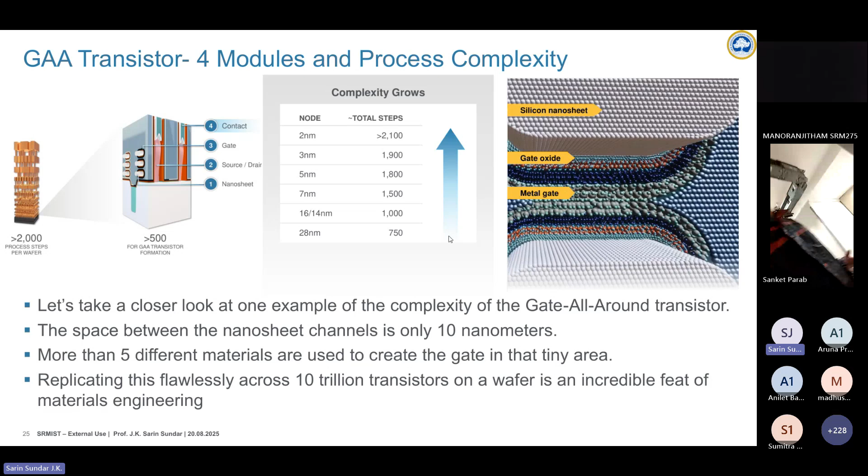And you can understand the complexity when we are going to different kinds of materials and a lot of ALD processes, both atomic layer deposition and also atomic layer etching, and also the inspection that you saw. You can do multiple 3 layers of nanosheets in a single inspection. You have to look at the different methods that have to be done. You have to look at the kind of residues.

And before getting into more of the defects, I also want to quickly show what you can do with simulation of the defects. So last year, I think SRM and also many other institutions got access to another industry software called SEMulator3D. In SRM IST, we have this year about 150 licenses between the ECE department and the nanotechnology department. You can do virtual modeling and calibration of various defects.

If you don't have the equipment, like even a research fab like IISc CeNSE or IIT Bombay requires more than 1,500 crores to establish, you can do a virtual emulation using these softwares. In this particular slide, what you are seeing is line edge roughness, especially after lithography. And then sometimes you also get shorter lines. This you can actually model and quickly emulate in your software.

Now LAM has given $400 million to the Government of India to release across various universities, and universities can apply for this program and get these softwares into your university, and you can directly talk to LAM or IISc and the India Semiconductor Mission regarding this.

And coming back to defects, why do defects matter? Because at this scale, what we are doing, defects are invisible. And these are the key drivers for yield and cost. I hope most of you know what yield is. And every defect is a killer defect. Right, and the industry has ways of overcoming it.

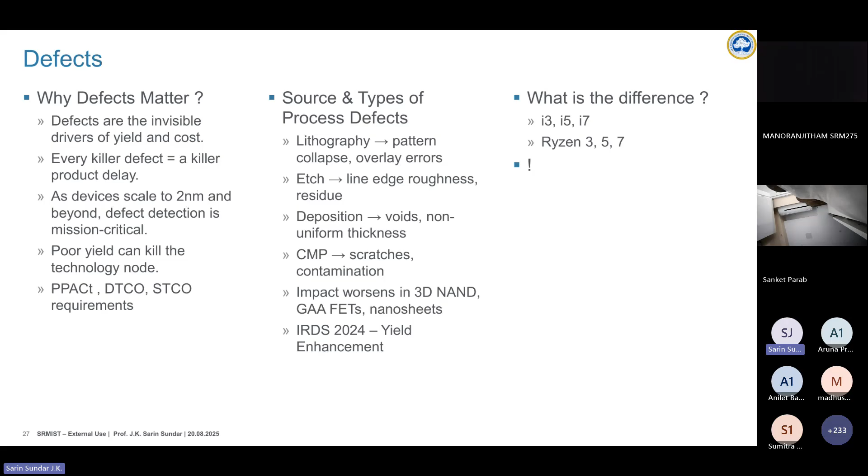And yes, this is about the IRDS. You will also find a classification of defects in IRDS and where they come from, right from the material in the crystal, stacking faults, contamination, stress, and also how the silicon wafer is prepared. That's why we never use the silicon wafer as it is in the factories. You have to grow an epitaxial, highly pure silicon layer first, and only then start your device fabrication on top.

And between the devices, you have overlay errors. Between the interconnects, you have ESD damage, sometimes cracks, and also layer thickness uniformity, contaminations, and, as you have seen earlier, different processes can contribute. And you will also find many of these things listed in the litho roadmap document, again in IRDS.

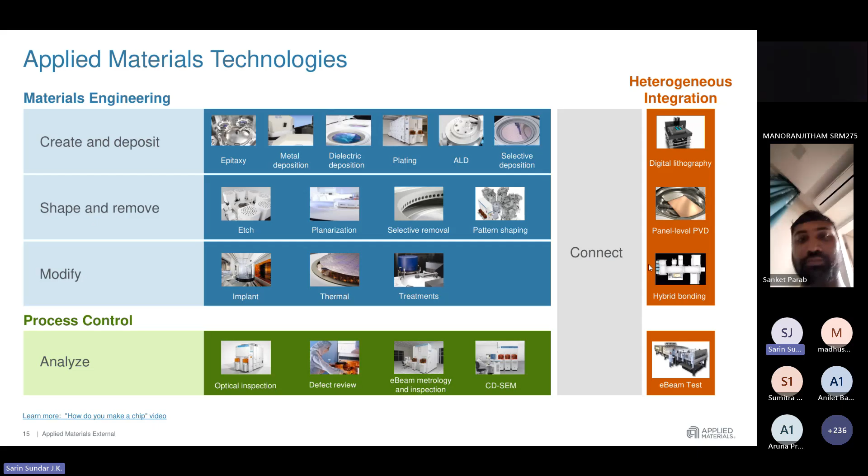And then again, for the interconnection, heterogeneous integration, you also have different kinds of equipment. But what I'm showing in this slide is only from Applied Materials. There are also other companies which make them. Here it's a much larger sheet.

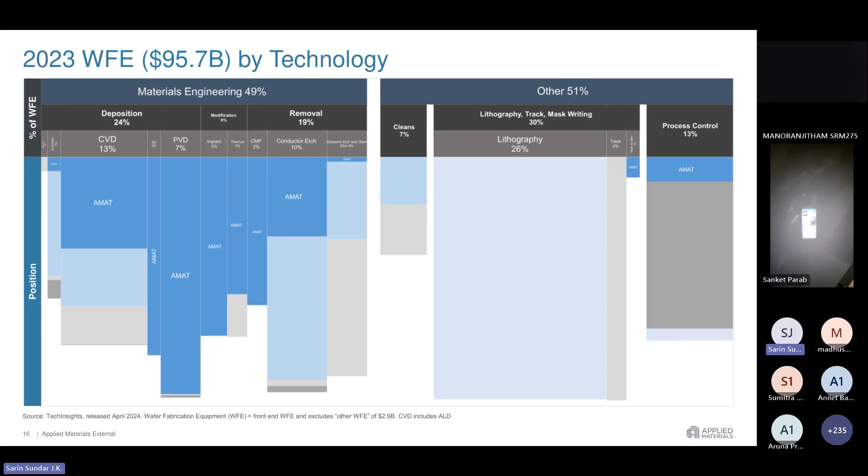So all this in blue is AMAT, that is Applied Materials. Those are the main one. And I think the light blue here is probably LAM, and then the gray here is Tokyo Electron. And here you can see the lithography, this big box is ASML. So there are various companies. That's a kind of market share and position. Just to summarize how broad it is, many companies supply this equipment.

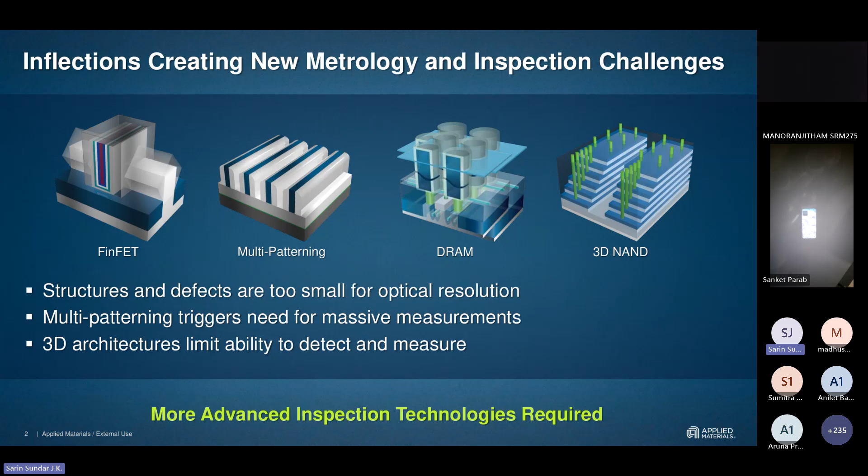Again, we saw this some time back. At 28 nanometers, we had close to 750 process steps, and today.

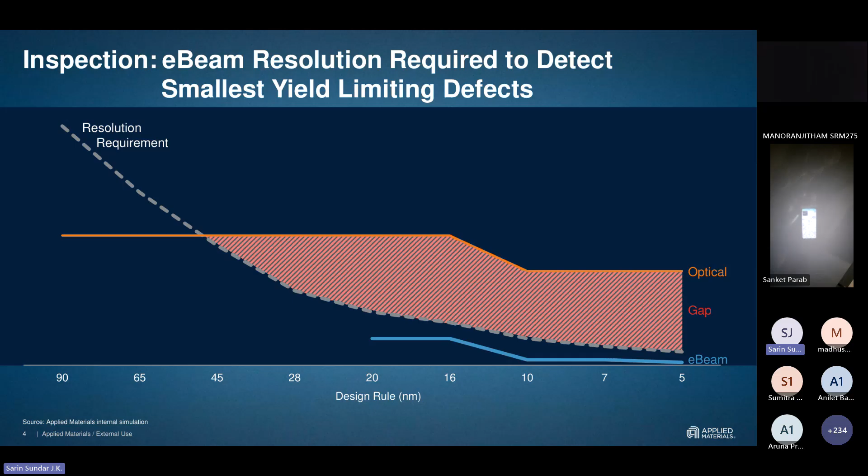On the 3D structure, you cannot actually see from the top view, but in the actual industry, you can only do all these measurements from the top. You cannot cut and break and see the cross section like you do in a university SEM. You have to do it live, and from the top itself, you have to analyze and make sure exactly how it will look in the cross section.

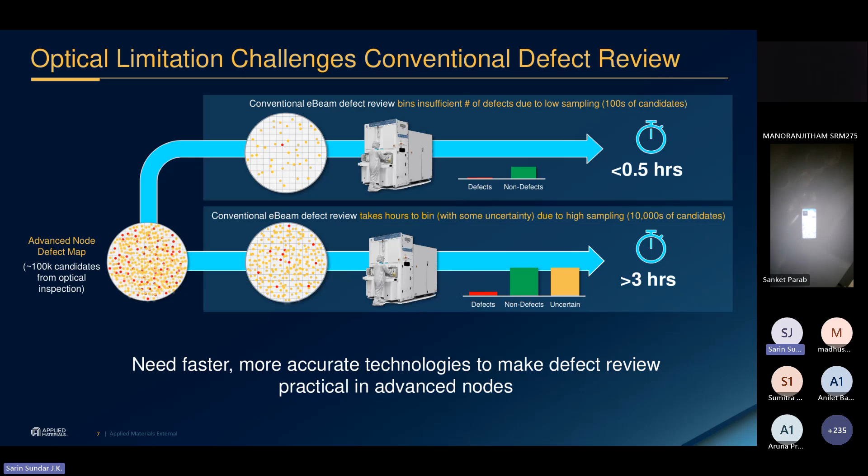So that's where you use image processing and advanced AI algorithms to also train on the site. And these are not a common AI model which will do for all machines. It has to be customized based on every machine in the factory, because every machine, when it runs, is going to be slightly different.

And then this is Applied's e-beam portfolio, which today we don't even call statistical sampling. We call it massive sampling. Typically, petabytes of data come out of a single machine per hour, and this data has to be analyzed on site through the AI models and classified, and the wafer is binned, right?

And some of the basics, you probably know this, how your SEM works. A thermal source of a tungsten electrode emits electrons, thermionic emission, and this is how a standard electron beam is generated, and typically the resolution of an SEM can be more than 5 nanometers. And then of course a field emission source is much sharper and requires a lower operating temperature, and cold field emission is at really cold temperatures, and the resolution is sub-nanometer, and we can do extremely fast imaging. So what it means is the spot size is also smaller, but we have high resolution and high throughput.

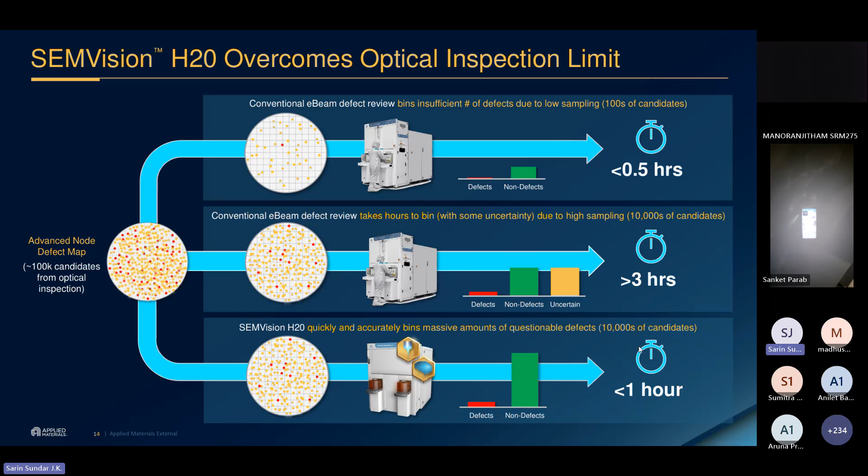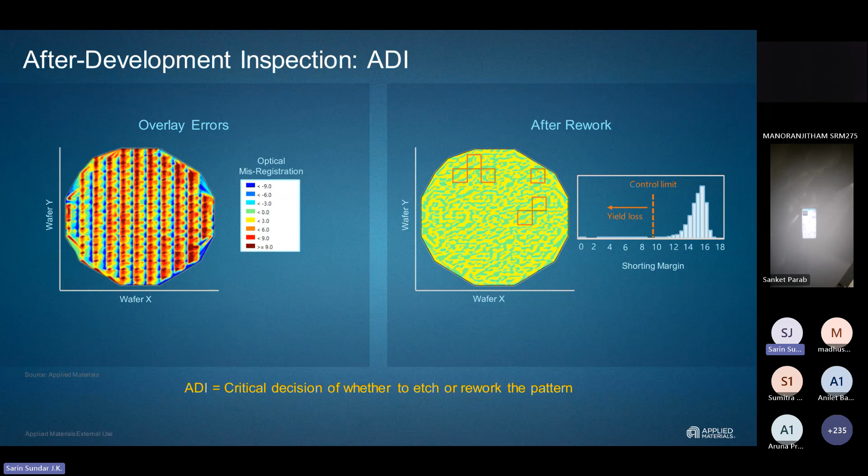And traditional patterning control is done normally when your structures are larger, which is typically at your interconnects. These are 1 micron structures, and this is typically how your wafer map looks like. And this is after etch inspection, after the etching process, after the ADI to AEI conversion for a wafer, that you can see here. And also I'll probably skip this.

And I'll skip this. And again, coming from statistical sampling to massive sampling. So in statistical sampling, we design where it needs to be sampled. There are acceptable sampling criteria. You have to systematically define the locations and where you can sample from. But even with various designs over the years, you won't form the complete picture.

In massive sampling, you use artificial intelligence to generate many more locations, so AI can be trained to see whether the defects are coming because of the chamber conditions or the process. Is it coming only at one location specific to that machine? So massive sampling can give you a much bigger and very precise picture. So that is the state of the art in the industry today.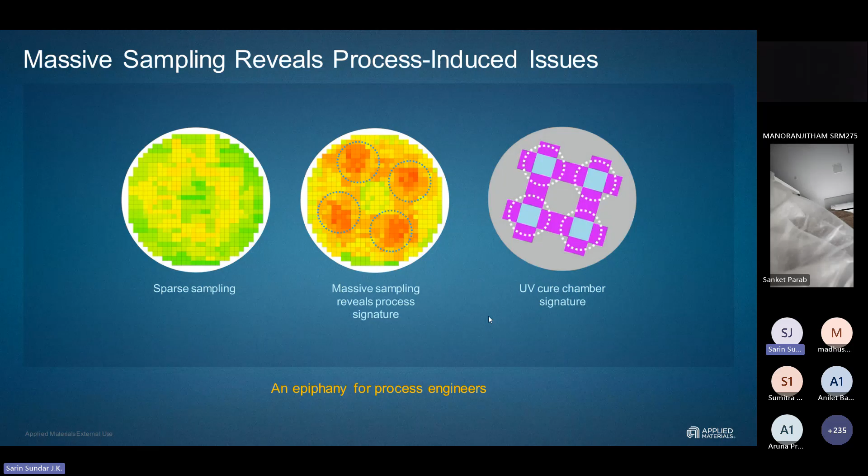So here is an example of sparse sampling and also massive sampling, which reveals actually the UV cure chamber's signature. This is how the UV lights are placed in the UV cure chamber. With statistical sampling, you won't actually see it is coming from the equipment itself. So people are also using this for the process engineers. It's a great tool, and you can use it to even design better equipment, right?

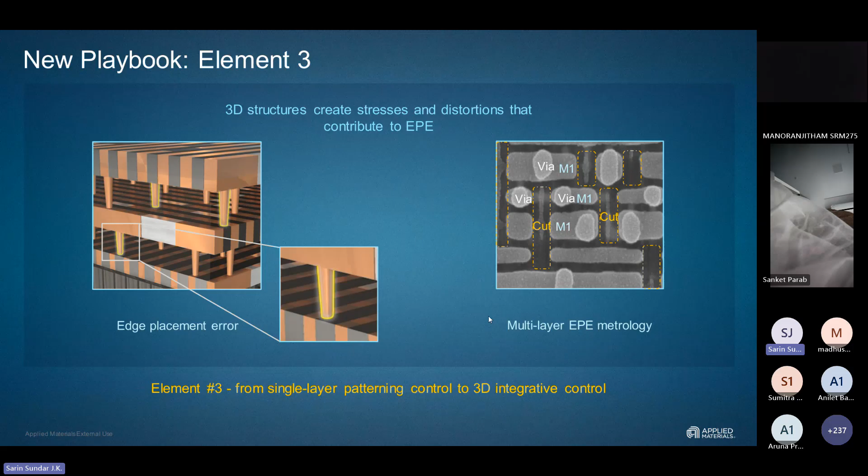And here again, stresses. There is again a new challenge now. We are already seeing reports, especially in NAND, when the number of layers is huge. It's more mechanical errors from stress developed, and more stress-related defects are coming into the industry right now.

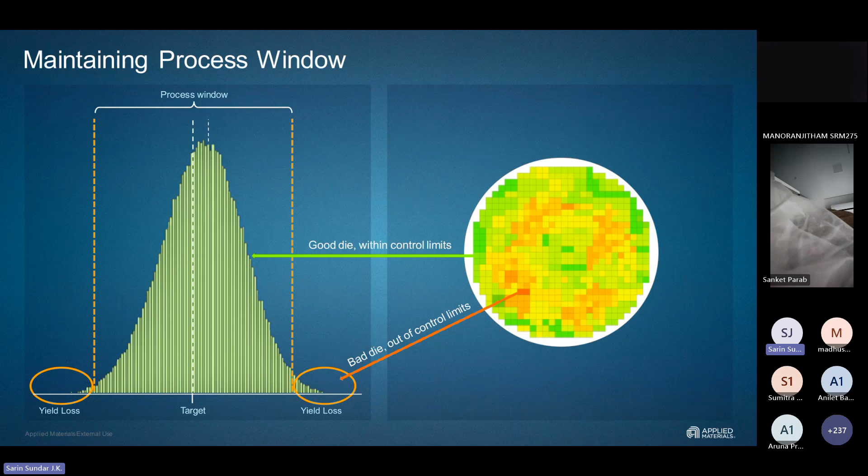Either it is too green or too high in red, based on whatever the specification given for that particular process. So if you want to maintain the process window, the yield loss you can clearly define from here, right? And if you want to widen the process window, you have your target, and you can also see if your process is shifting.

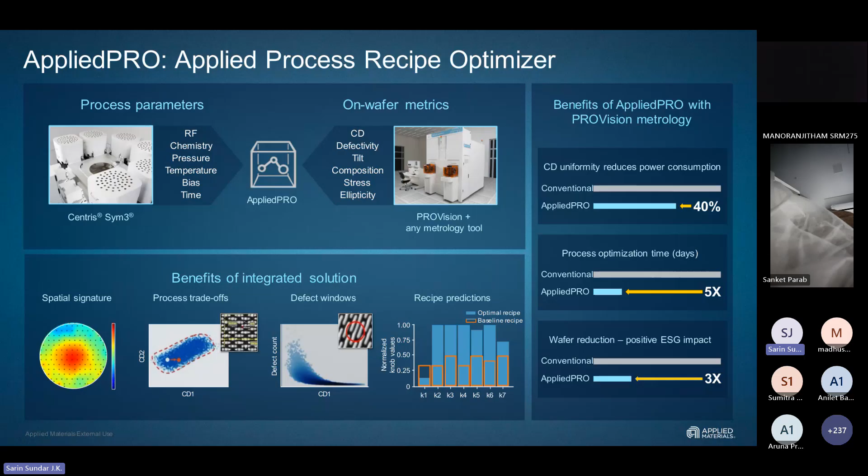And also, how am I with timing, ma'am? Do we have some more time? Yes, sir. Okay.

So typically, what it means is if you take the Burj Khalifa tower, the tallest tower on Earth, the aspect ratio, the width to height, is 1 is to 9. So it is 9 times taller than the diameter. But here, a typical via or hole in your NAND memory is 1 is to 500. So we have to inspect from the top. When you do an electron beam inspection from the top, you have to see whether it is tapered, whether there are defects at the bottom. It's going to be very, very challenging.

And these defects are analyzed using big data and AI, but this has been done in the industry for a long time. It's not something new. AI is not something new in the industry. As I told you, the old perceptron model is from 1962. At least at Applied Materials, we've been using this since 2010. We used to call it different kinds of names. And today we have better models, definitely. Classification, training, and different kinds of AI models are now coming, especially after the recent developments in the last 5 to 7 years.